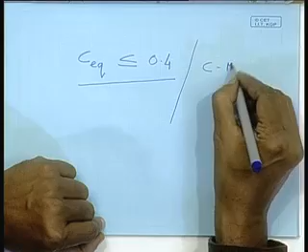Well, by putting different alloying elements and subjecting it to different heat treatments, we can get higher mechanical properties. We can get higher tensile steels, still keeping the carbon equivalent low. So we get steels called HSLA, high strength low alloy steels.

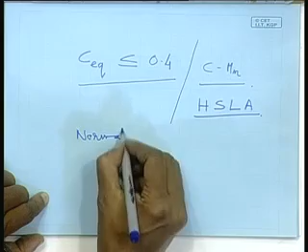So one way of telling is that there's normal strength steel, and another is high tensile steel. Normal strength steel means steels whose yield stress is of the order of around 220 to 240. What unit?

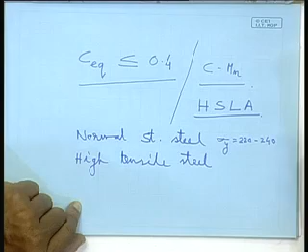Well, megapascal, yes, or newtons per millimeter square. I somehow feel more comfortable with this unit than megapascal. Anyway, high tensile steel is where the yield strength is greater than or equal to around 320 newtons per millimeter square.

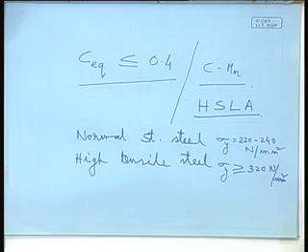So any steel having yield point stress of 320 and above is referred to as higher tensile steel. They are also at times referred to as high yielding steels, which in short are written as HY steels.

And also we have talked about HSLA steel. So what is the difference between these two? Both these are high tensile steels.

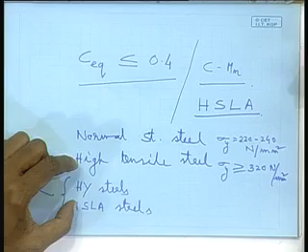Though in shipbuilding and offshore platform construction, I believe around 80 to 85% of the steels used will be normal strength steel. In some specific cases, specific requirements will go for higher tensile steels, for the simple reason that higher tensile steels are only used where we have a so-called weight restriction. What's the use of using higher tensile steel? Why do you use it?

The reason is it can sustain a higher level of stress, or in other words, I can keep the scantlings down - the thickness of the plate, the dimension of the sections - low for the same given load. If I use normal strength steel for the same load, the plate thickness may work out to be 16 millimeter. Using a sufficiently high strength steel, that thickness may come down to 12 millimeter. So I have a weight saving.

So wherever there is a restriction in weight, like if you want higher speed, you need to bring down the weight of a vessel. In such cases, specific requirement of reducing weight, then only go for higher tensile steel, otherwise not. Because otherwise, if there is no weight restriction, I use normal strength steel - the weight will be heavier, okay, let it be. If it does not affect my functionality or cargo carrying capacity, it's better to use normal strength steel, for the simple reason they are cheaper.

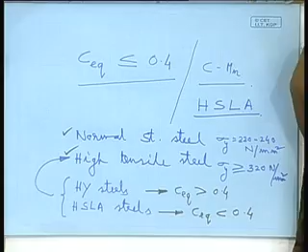You have HY - generally these steels are designated in this fashion, say HY80 or HSLA80. This is high yielding steel, yield stress is 800 newtons per millimeter square. High strength low alloy steel, yield point is also 800. Imagine, our normal strength steel is hardly 240, this is 800 - substantially strong. There are HSLA 100, meaning 1000 newtons per millimeter square, very strong steels.

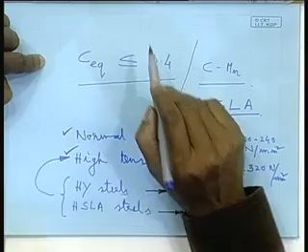So the difference between HY80 and HSLA80 - the fundamental difference is that for HY80 the carbon equivalent will be much more than 0.4, while for HSLA80 carbon equivalent will still be less than 0.4. So high yielding steels are difficult to weld by conventional welding methods, the ones used for normal strength steel. It will crack - you weld it and after the weld has cooled down, or during cooling, it will crack, meaning you cannot weld it. That is why it is said that if carbon equivalent is more than 0.4, the steel is not weldable, or weldability is poor.

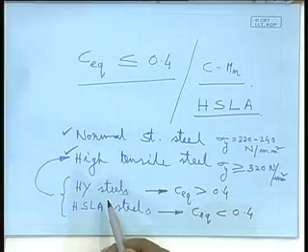That is how HSLA was developed in later years, which gives you the same mechanical properties as HY steels but improves the fabrication quality. That means with the method it was made, the alloying content was kept low, so carbon equivalent is less. Carbon equivalent means carbon and other alloying elements equivalent to carbon. So HSLA steel has low carbon equivalent and is easily weldable, meaning you can weld it with conventional techniques as used for normal strength steels.

So that is about HSLA steel. Obviously all these benefits come at a cost. HSLA steel is very expensive because you have the strength as well as weldability and low carbon equivalent. So it is more expensive than HY steels, but from a construction point of view, HSLA is naturally preferred wherever you use higher tensile steels.

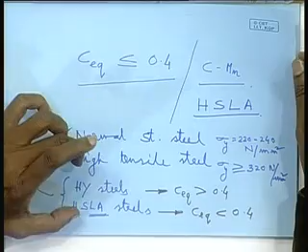Anyway, whether it is normal strength steel, higher tensile steel, high yield steel, or HSLA steel, all steels as they come to the shipbuilding yard are received in the form of plates, rolled plates. Those rolled steel plates come with a coating on top of the steel plate. That coating forms during the process of manufacturing the plates, and it is referred to as mill scale.

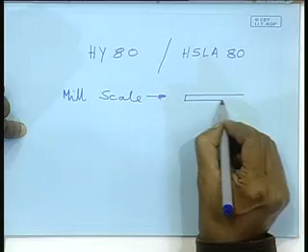This is essentially nothing but the steel plate over which, as if there is a layer, covered with a thin layer on both sides, which is referred to as mill scale. So as the name suggests, mill scale means some scale has formed in the rolling mill.

How are these steels formed? They are essentially hot rolled from bigger ingots. That means, suppose you are making HSLA 80 steel. You will produce the composition of HSLA 80, whatever alloying elements are needed for that strength, and take it out in the form of an ingot from the steel plant. After all that process of alloying, deoxidation, and the manufacturing process of steel, you get the ingots.

Ingots have a rather squarish shape, and that is then passed subsequently through a series of rollers, such that you end up at the last rolling mill where you have the required thickness. So from a huge thick ingot, you bring it down to thin plates - thin meaning it can be 4, 5, 10, 15, 20, 40 millimeters, whatever thickness you roll it out to. So the entire process is called hot rolling.

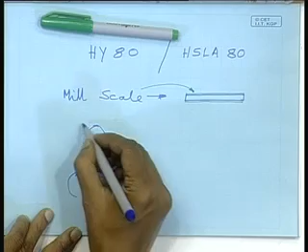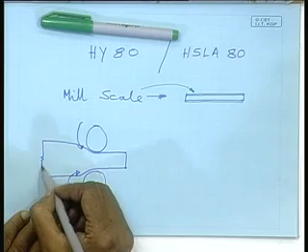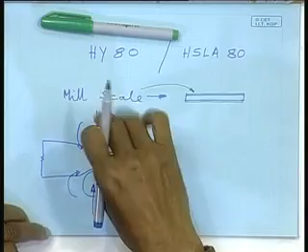So the ingot is under tremendous pressure, the rollers are rolling and it is squeezed out, as if. There will be a set of such rollers till you get the final thickness, and this is being done at elevated temperature. So what happens to the surface? Apart from the whole thing getting squeezed and thinned out, because steel is a malleable material - had it been a brittle material this would not have been possible - being malleable, you can do this operation.

So what will happen to the surface when finally I get the steel plate out to my desired thickness? Suppose this steel plate has come out like this - what do I have on the surface? There will be oxidation taking place on the surface material, because it was at a high temperature exposed to the open atmosphere. So there will be an oxide layer forming on the surface, and it is under pressure.

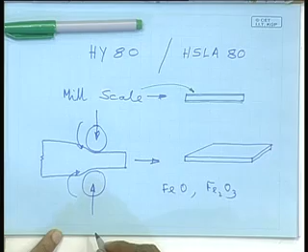So in the process, that layer of oxide will be firmly bonded to the plate surface. That layer is referred to as mill scale. Mill scale is essentially a combination of FeO and Fe2O3 and so on - it is the oxide layer that forms during the fabrication of the plate, during the rolling of the plate in the steel plants.

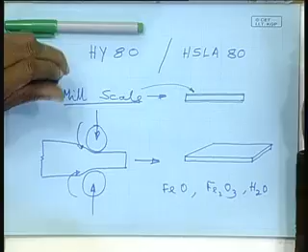So this forms, and now the steel plate has been formed, it lies there and then is delivered to the shipyard. As and when you buy it, it will be brought by ship, railway, or truck, and will be dumped in your steel stock yard. So the plate comes with this mill scale layer built in, and it may also absorb moisture in the process - some H2O goes in, and there can be some hydrated oxides forming. But what you will have is a steel plate with a layer of mill scale.

That is what it is. That means from that point we start. Now, why we talked so much about this mill scale? Because this mill scale temporarily, till such time it came to the yard, it actually gave protection to the steel surface, meaning further corrosion or rusting, further oxidation did not take place. It did protect. So that way it has a positive role to play.

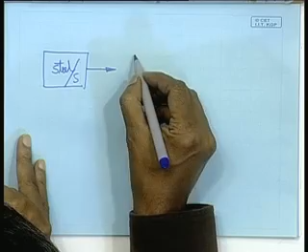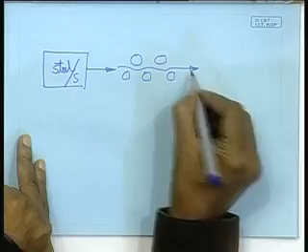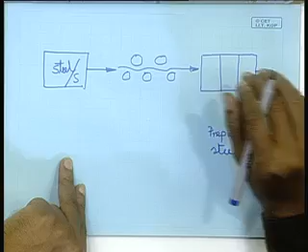Now, the next stage of operation in a shipbuilding operation is, well, you have the steel stock here. From there the material is supplied, it goes to a series, a kind of rolling machine, and then enters a chamber where some operations are carried out, and then we get the so-called finished prepared steel, or processed steel, prepared steel, meaning ready for subsequent cutting and fabrication operations. That means at this stage, from here all the other operations start.

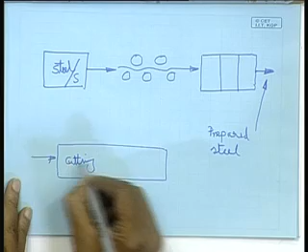Basically, all operations I am showing in one block, that is essentially cutting, shaping, welding, isn't it? And to this there are necessary inputs coming in as that of other.

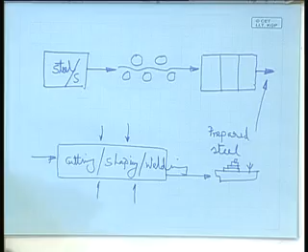In a very simple way we can see all the activities. Here I have elaborated it, here I have clubbed everything. This is the actual fabrication work. In this zone, I am doing the actual steel fabrication. By steel fabrication I don't mean steel making. That I was talking about earlier, steel making.

By steel fabrication, we understand that the steel plates are there, ready to use. Ready to use means, in fabrication, we have to cut them to the required size, we have to bend them to the required shape if required. For example, your ship's bow you want to fabricate, so there will be bent plates needed. Then I will have to put them together, weld them, so you get the ship hull, and simultaneously do other works which I have referred to by this arrow, putting the engine in, fitting the air conditioner, the piping, pumps, machineries, everything, superstructure, and finally get the ship.

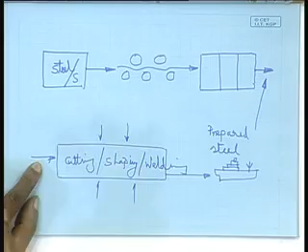So before it comes here, work starts with the steel material, because you start with the hull fabrication. So for the hull, how does the work go? From the steel stockyard, you take the plate, make it ready for these operations - cutting, shaping, welding operations. So what is done here is something called plate preparation. That means you have to prepare the plate.

For construction, plate preparation you will have to do, because you have got the raw steel plates from the steel plant. You have to prepare them so that they become good for subsequent usage, and finally good for the product. So something called plate preparation. So what do we need to prepare there?

Is welding not possible on the mill scale itself? No, it is not about whether it is possible or not. We will just come to that, why this preparation we are doing. Some preparation is needed, because we have seen the raw material we are getting, the plate, comes with some mill scale.

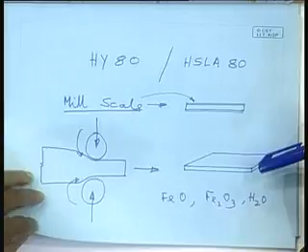I have not said one more thing - in addition to mill scale, the plate may remain distorted, not absolutely flat, for the simple reason it has been handled many times in the steel plant. It has been lifted and loaded on trailer, transported, again lifted by crane, again unloaded, again lifted by some crane and loaded for further operations in the shipyard. So the plate may have deformed, bent.

So before we start working on the plate, I need it flat, straight, because that is my datum. I know in 2 dimensions the shape, I know the dimension. Then I cut it to the required size, and then I shape it, give it a 3D shape as per my hull form. So I need it flat. That means preparation is needed.

One is to straighten the plate, for straightening, there might be some deformations, so I need to straighten. Another aspect which is not visible, that needs to be removed, is residual stress.

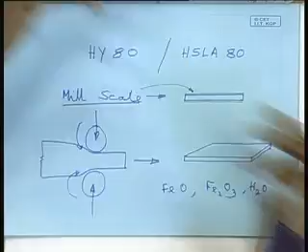In the process of fabrication of the steel plate and subsequent handling, deformations and residual stresses may be imparted. It is very likely the plate will have some level of residual stress. As such, residual stress does not do any harm, because some part of the plate will be in tension and some other part equally in compression, so it neutralizes. But if it remains, subsequent operations may change the stress level, leading to deformation of the plate or lessening of the fatigue life. So it is preferable to remove the residual stress.

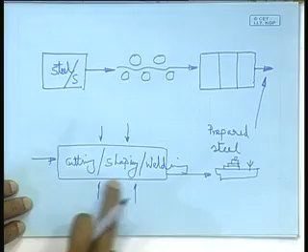So straightening is required, residual stress removal is required, and mill scale removal is also required. Plate preparation involves these 3 operations. Once these are done, the plate is ready for the sequence of activities: cutting, shaping, welding, and finally the final shape.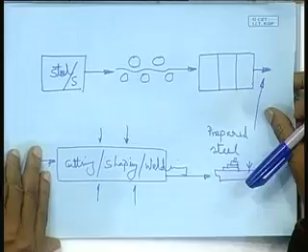This is plate preparation. I've shown here the area where the plate passes through these rollers - that is essentially straightening being done, along with stress relieving and residual stress relieving.

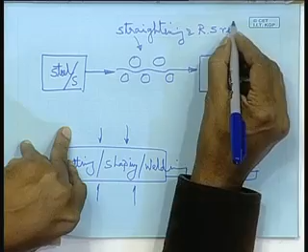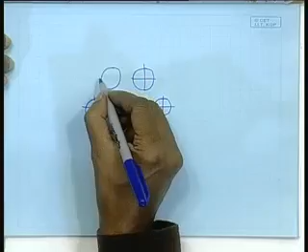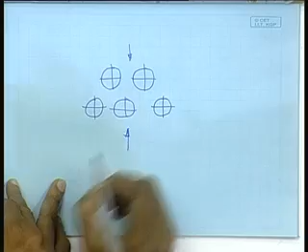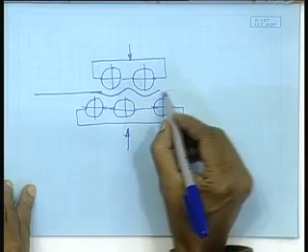What I am drawing here is a 5 roller machine. This is something different from a 2-roller setup that applies sufficient pressure to squeeze it down to the required thickness. Here there are 2 sets of rollers, and the necessary force should be applied. These are all connected such that together the necessary force can be applied, so that as the plate enters, this roller bends it down, the middle roller bends it up, and again it bends down, and the ultimate result is it comes out flat. This middle roller pushes it up, this one pushes it down.

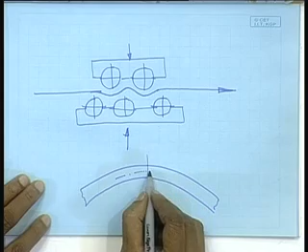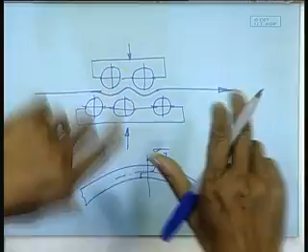So essentially the plate is being subjected to a stress level much beyond the elastic limit. These are large deformations, meaning the plate is physically getting substantially bent. In the process, in the cross section, if this is the neutral axis, the stress level would look somewhat like this - this is the yield point stress, so almost the entire section has yielded. That means along almost the entire thickness, the top part was in tension and the bottom part in compression. In the next sequence, it just reverses. So I have given here 3 stress reversals in the process.

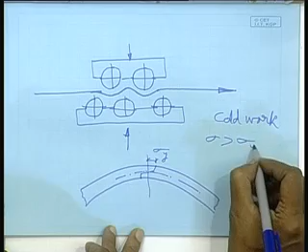This is being done at room temperature, so this is a kind of cold work I am imparting to it. The stress level is exceeding the yield point stress in the plate. So through cold work with stress level exceeding yield point stress, the residual stress gets removed, because residual stress is generally of the order of yield point stress. So I exceed that stress and do it several times - in this case 3 times.

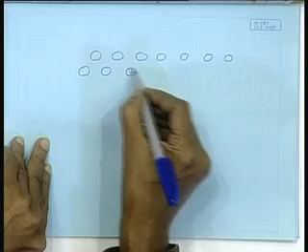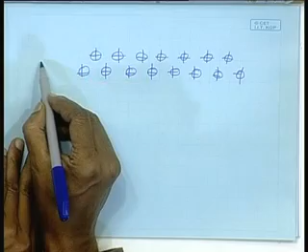I can do it 20 times depending on the requirement. That means there are machines where you have several rollers, and the same rolling operation - stress relieving and straightening - is done. So in this case it will go like this, almost as if the bending happens several times. So this is a 5 roller machine, this can be a 21 roller machine.

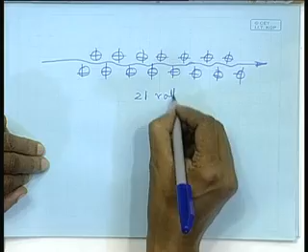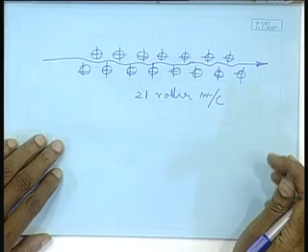The difference is that for thick plates, I can use fewer rollers. For thinner plates, I need to do it more times. That means if I have a 6 millimeter plate to be straightened and stress relieved, I may need to bend it in one direction and then the opposite direction several more times compared to a plate of say 20 millimeter thickness. A thicker plate requires a straightening machine with fewer rollers, thinner plates require more rollers. So generally, up to 10 millimeter thick plates, a 21 roller machine is required, whereas for 16 millimeter and above, a 5 roller machine will do.

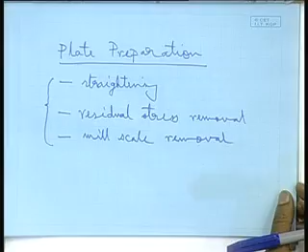So the very first operation in the entire process, referred to as plate preparation, includes the sub-activities of straightening and stress relieving, and once that is done, it is directly fed to the next activity, which is mill scale removal. These are taken together in plate preparation. So what do we do in mill scale removal? Here again, the mill scale is removed.

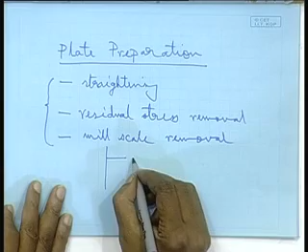In the operation, straightening and residual stress removal are being done simultaneously. Both are taken care of by one operation, passing the plate through those rollers, a straightening machine. Once it comes out flat, it immediately enters the next chamber wherein mill scale is removed.

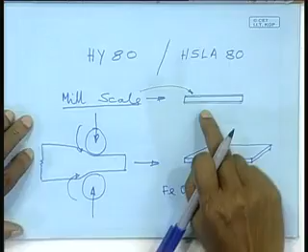Now, what physically happens when the mill scale is removed? You get a very bright steel surface. With the mill scale, the steel surface was dull because that was the oxide, and it is already oxide, so no more further oxidation, no more rusting. Rusting is nothing but oxidation, so it remains as it is.

Now, the moment I forcibly remove that scale, I get a really shining surface, the pure steel surface. But if I keep it like that, it will rust immediately. So I need to protect it with some kind of painting, which is referred to as priming. So priming is done.

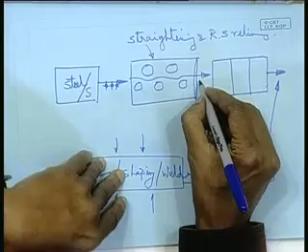Once priming is done, all these operations can be automated. These are fed through roller conveyors. You put the plate on a roller conveyor, it rolls, the plate goes in, it is again all basically roller, and it goes out. The transporter is a roller conveyor, it goes in, inside also. So it is a continuous automatic process.

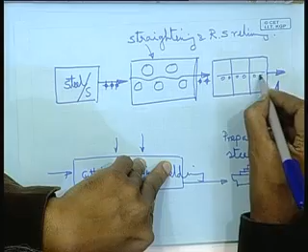The plate is just moving from the steel stockyard. With the help of a crane, you lift the plate and put it on a material handling device, which is a roller conveyor. You have seen conveyor belts carrying coal, sand or ore; this is similar, like in an airport where things are carried on rollers. The rollers are powered, so if it rolls, whatever is on top will move. Simple, but a very effective means of material handling.

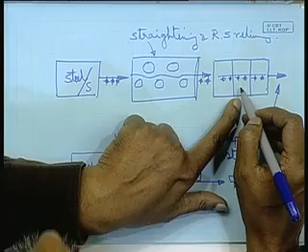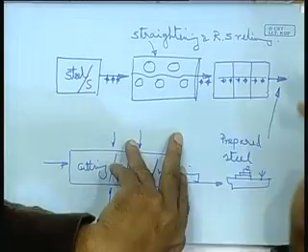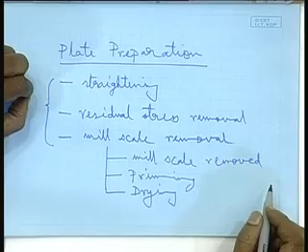So the steel plate moves, goes through this straightening operation, and straight away goes out. Instead of dumping it, it again goes on a conveyor system and enters this chamber. I have drawn three chambers purposely: in one the mill scale is removed, in the central chamber it is primed. Since it is a continuous process, priming means a kind of paint is put on and it should dry up, so this is a drying chamber, and it comes out as ready material. So priming, drying - that is the entire operation of plate preparation: straightening, residual stress removal, and mill scale removal.

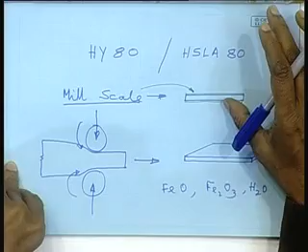There are various methods for straightening and residual stress removal, which we have seen, and for mill scale removal, which we will discuss. But the question remains: why do we remove it? What is the problem if it was there, since I said the mill scale protects the plate, and I need not do priming and drying if it is automatically protecting it?

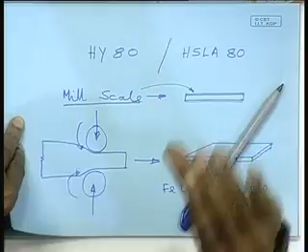It is removed because, due to the very process of manufacturing, this oxide layer forms and the bonding of the oxide layer with the plate is very strong initially. But over a period, that bonding becomes weak. This is also a very interesting phenomenon. So if the bonding becomes weak, what will happen?

It will peel off. Just as the plate is standing there, suddenly you will find that a small chunk of that oxide layer falls off. Physically, if you keep the plate standing for a good number of months, one day you will find a lot of dirt has accumulated at the base of the plate. What has happened is that these chunks have fallen and accumulated there. That is the problem.

If we do not remove the mill scale and build the ship, apart from the problem of welding - where the weld deposit may get contaminated with this oxide, so before welding I have to scrape the surface thoroughly to remove any mill scale - welding is only one small problem.

The bigger problem is that you build the entire hull or structure, and then you put it in service, and the service condition is a rather corrosive environment. One of the means of protection is painting. One of the most effective means of corrosion prevention is by providing a paint film on the surface. By painting the surface, you avoid contact with oxygen and the corrosive medium, which in general consists of oxygen, water, electrolyte and so on.

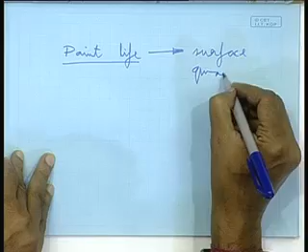So, the paint life depends on the surface quality over which the paint is being applied. There are other aspects also, depending on humidity, temperature, thickness of layer, but for the time being, let's focus on surface quality.

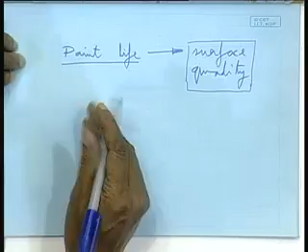So, what is that surface quality, how do we achieve it? That is what we achieve through plate preparation. The desired surface quality we achieve through plate preparation. What is the general thing we get? After the surface is cleaned of the mill scale, we get a shining surface. That shining surface gives us a certain quality, depending on how you are removing it, by which method and how effectively, all that leads to different quality of the surface.

That quality is not only about how effectively the scale has been removed, but also how smooth the surface is. Those are referred to by some standard, say SA 2.5. This standard refers to a surface smoothness standard. This SA scale goes from, I believe, 1 to 3; we need somewhere in between. SA 2.5 is a good quality of surface finish.

So, that is how we see that the mill scale should be removed before you get into the actual fabrication operation. The main reason for removing it is that if you do not, the immediate problem would be with welding - you will be able to weld, but there would be a possibility of more welding defects because of inclusion of these oxides.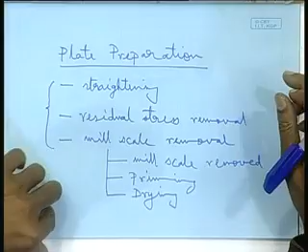So mill scale should be removed. That is done through the process of plate preparation. It comes within plate preparation that it should be removed. Then that whole operation can be done in one go - you remove the scale, prime it, and dry it.

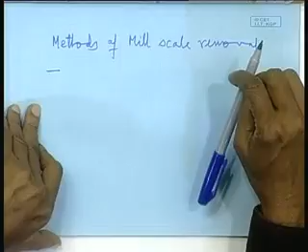So next comes the question of how do we actually remove it. What are the methods? Tell me some of the methods. From common sense, you can guess one method at least.

We can hammer it off - no, through hammering it will not go, the bonding is quite strong. Use of solvents - yeah, one method could be use of solvents, we'll give a good name to it. What is the first and foremost method? Scraping it off - scraping is also not easy because the bonding is really strong.

The first and foremost method could be natural descaling, a natural process, because with time it peels off. I just stack the plates vertically and keep them. In a natural process it will peel off. So this first method can be referred to as the natural process.

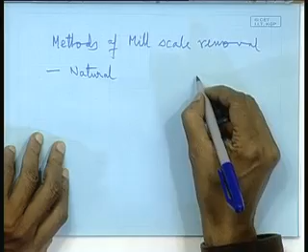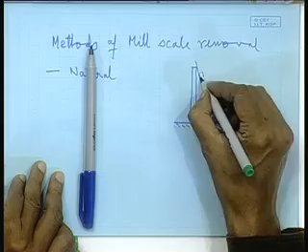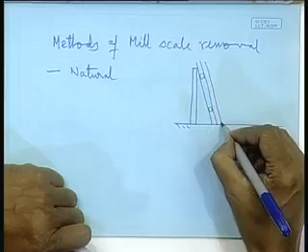In the natural method, what is done? Just imagine a situation - this is my ground level, a pillar is there, and I have stacked the steel plates like this, separated in between by wooden blocks, say some wooden blocks, so that the plates are not touching each other. You just keep them standing.

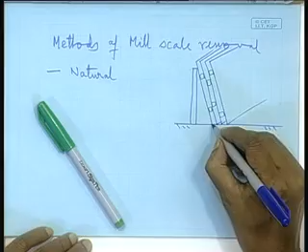So in this process, what happens? You stack them in the stockyard and let them lie there in the open, subjected to rain, heat, and cold. In the daytime it gets heated up, at night it cools down, and if it rains it gets washed with rainwater. So naturally, it automatically gets loosened and peels off. Keep it like 6 months, and after 6 months the plates will be fairly cleaned, meaning the mill scale has got removed. So that could be one process - very crude, but still a process.

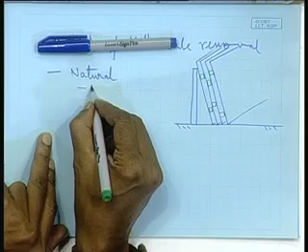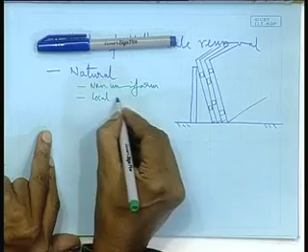The basic drawback is - is it uniform? Yeah, the basic drawback is it will not be uniform. So you cannot guarantee that 100% has got removed. There will be local rusting, local corrosion, because in some places it gets removed early and in other places later, and the worst is some places are bare steel right next to mill scale. So it will form a galvanic cell and galvanic corrosion will set in, and wherever the scale has peeled off, heavy corrosion will occur.

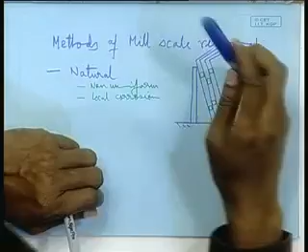So after 6 months, or even after 1 year, if you use the steel, you will still have lots of patches. Some will be very clean where the scale has recently peeled off, and because the bonding is not uniform, some may peel off after 2 months, after 3 months, and so on. So the plate surface will not be smooth at all. This is definitely not a good method, but it could be one method - for those who cannot afford other methods, at least this is an option, though it has other drawbacks.

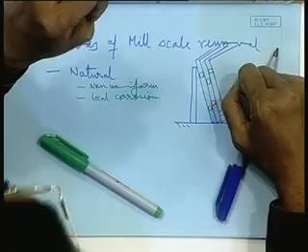That means you have to keep the plates lying like that for a substantial period of time, meaning you have to invest in the plates, buy the steel plate, and keep it unutilized. That is not a good business practice - you buy something and it remains idle. Though it is not truly idle, it is doing some operation, but that operation is not very effective. So that is the natural process.

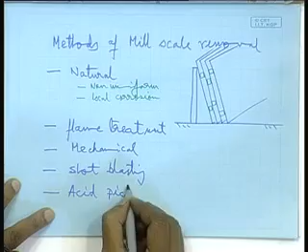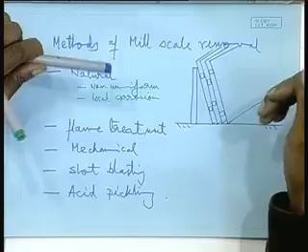The other processes are flame treatment, mechanical means, shot blasting, and chemical methods like solvents and acid pickling. So these are, one can say, 5 different avenues to remove mill scale. We will talk about them in the next class - how they are done, and we will see their effectiveness, which one is what.